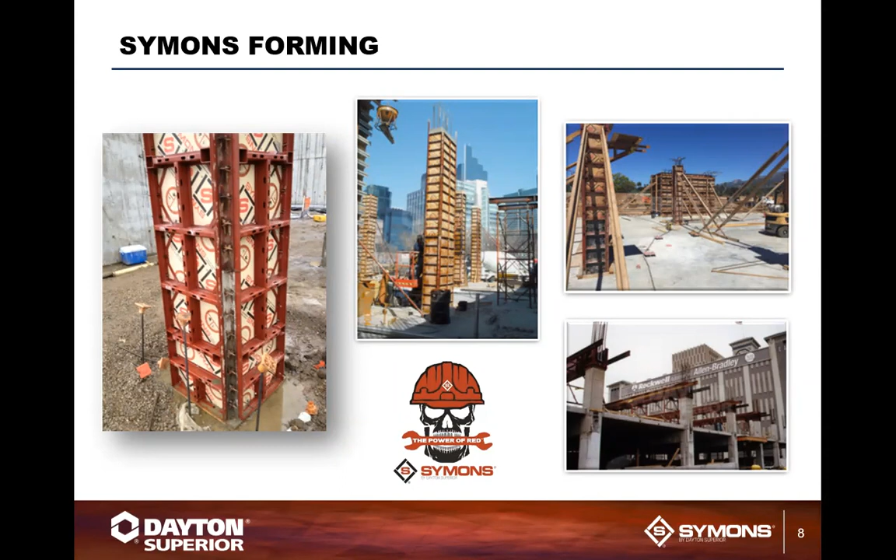So standard applications, typically here you see some of the standard applications, and a lot of these are our clamp systems. But we can gang form most of your perimeter walls, basically giving you your tub basin walls with a clamp system. This basically allows you to gang form a small random section and then use it multiple times within the concrete pour, saving you time and money, because obviously time is money.

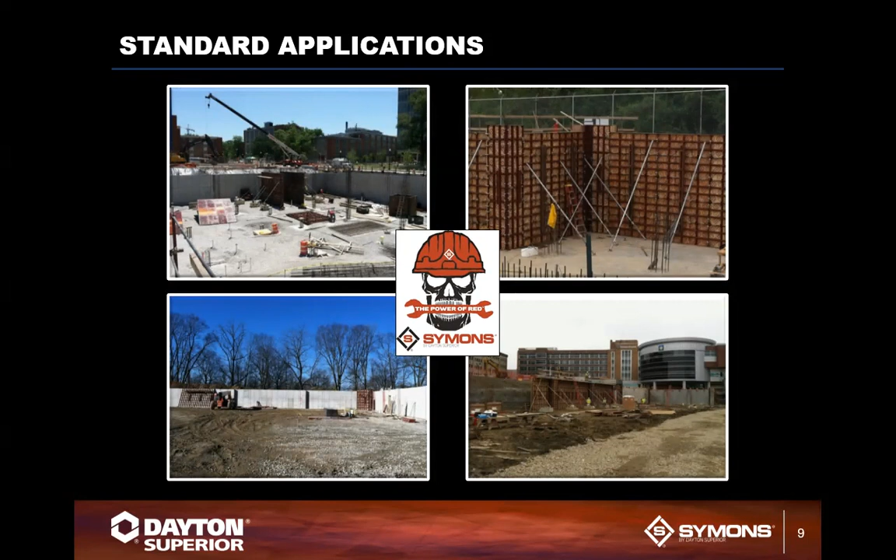As you can see, the finishes that we get from our clamp system, because of the panelized system, it's a wood face steel frame structure, puts out a really nice finish on the concrete wall. You don't see a whole lot of joint lines from the concrete forms where they actually butt up against each other.

They're easily moved by crane, and they are what I'm going to call pseudo handset. You can use this system as a handset. It is a heavier panel than our typical handset, but you can set it by hand if need be, or you can gang form it to facilitate whatever your needs are on this project.

What is that we're looking at, Chuck? Those are basically just a gang. What you see on the right-hand side is a gang form wall panel, where we've used a Symons Soldier as a whaler, to help maintain a vertical position within the form.

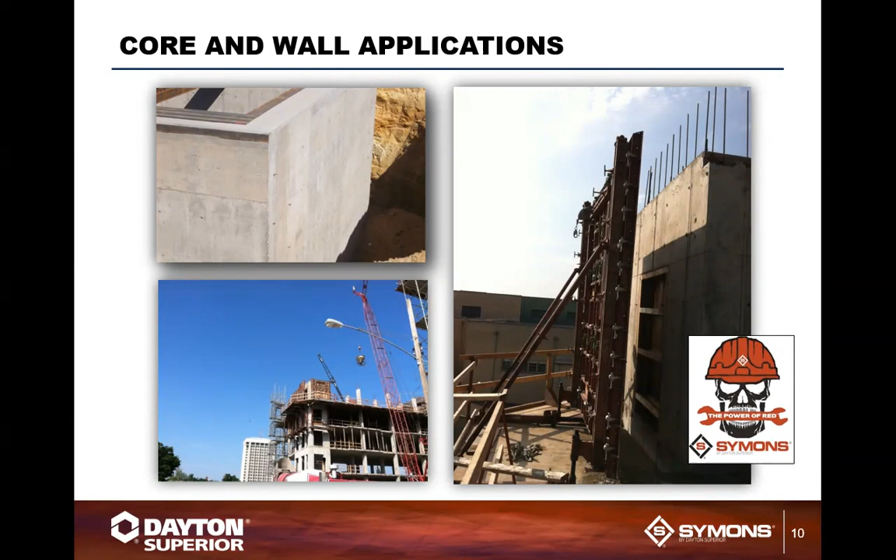This project they're looking at here was basically a hospital in the Dayton area, and it required a very high degree of accuracy when the walls were poured from top to bottom. So we used the steel soldier beam to accommodate and make sure everything was in alignment. Thank you. Always fun.

So we also have our FrameFast system. Like I said, we have multiple systems here, people, so don't get nervous when you're seeing all these systems. Call and ask, we can walk you through what systems we have.

The FrameFast system is one of the oldest systems in the market. It uses frames and X bracing and everything to help set up your shoring needs and wants, and typically comes in a 50 KSI steel project. Comes in 4 by 4 foot and 6 by 4 also.

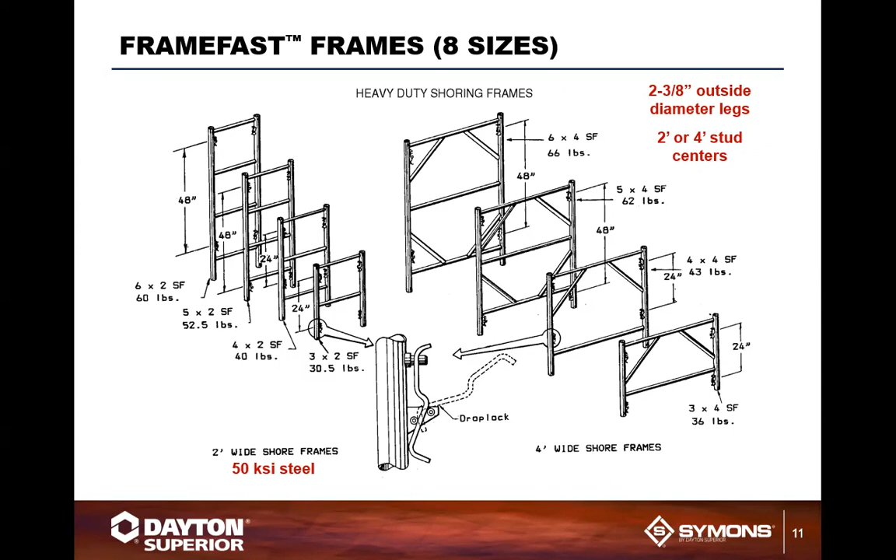FrameFast actually enables you to set up your formwork with stringers, lumber. You can have your frame, your screw jack. It's one of those systems that's been around for a long time. Is it the best system for every job? Probably not. But does it fit for a lot of the needs? Yes, it does. So it does give you an adjustability factor that a lot of systems can't. That's one of the highlights with the system.

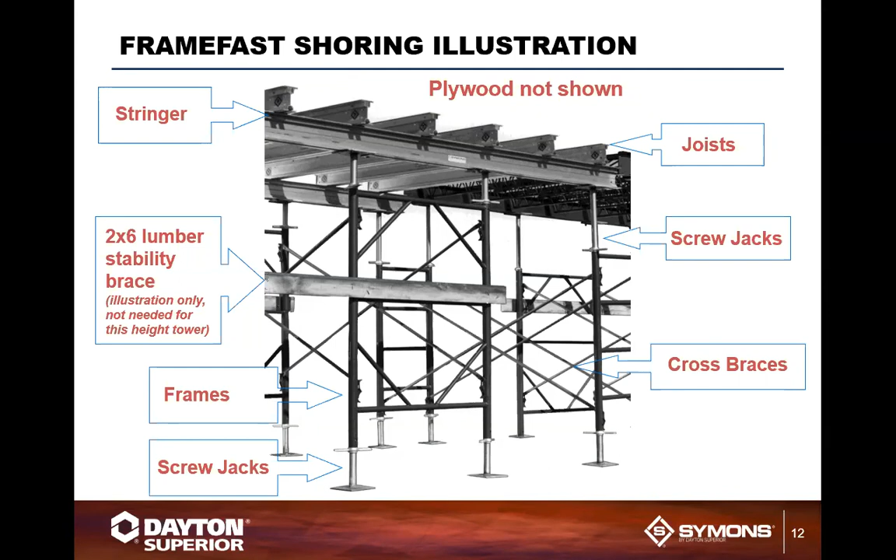Now, when we're talking about the newer systems, they actually access for high rise, we're talking our Drophead system. One of the fastest systems in the marketplace. Basically, you're setting your vertical pipes up with a frame network overhead, dropping your plywood on top of it, pouring the slab, reshoring, and moving all this material, dropping it, and then sliding it from one floor to the next floor up. It's extremely quick. You can typically look at a 3 to 5 day turnaround on a lot of projects here.

We see a lot of metropolitan areas. They typically have a 5-day turn cycle or a 3-day turn cycle. That means every third day or fifth day, they want to form another section of floor.

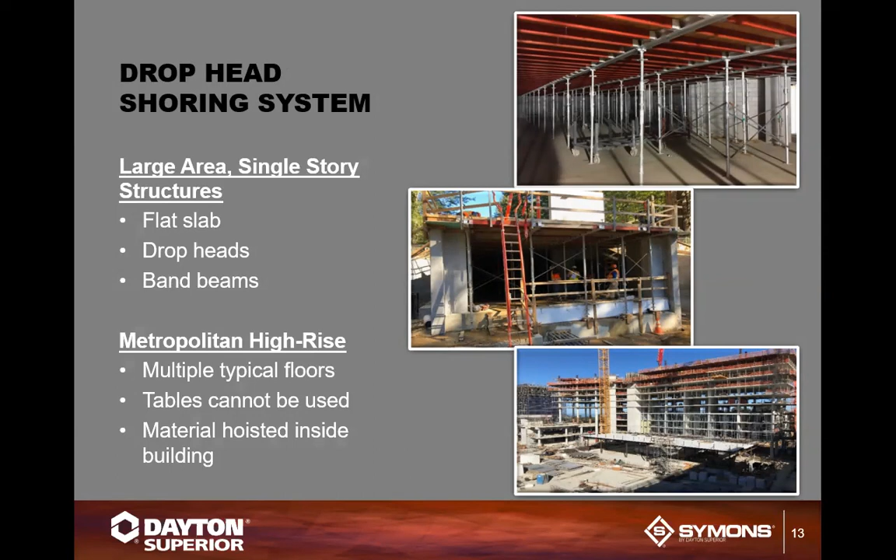The Drophead system also does a couple of things that most systems don't do, and that is it leaves basically the underneath system where you've formed up your floor wide open. So you can basically walk through there without any problems or issues. So while you're pouring the floor overhead, you can have people underneath finishing up doing things on the floor below it, which makes everything go a lot faster and quicker and easier.

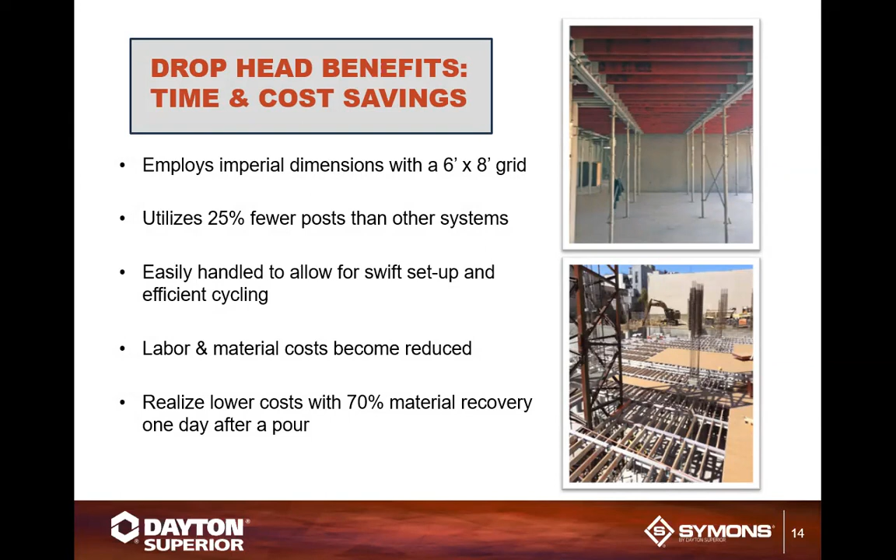We can also go into a panelized deck system, very similar to the Drophead system. It leaves everything wide open underneath here. This uses, in lieu of that, an aluminum beam system set up overhead. This one has a modular panelized system that's like putting Tinker Toys or Lincoln Logs all together so that everything falls into place.

Obviously, I'm showing my age for those. How about we go into Legos? Hey, I used to play with Lincoln Logs.

Well, a lot of what this does is these systems enable you to set up the system. You can set up a 6x6 panelized system relatively quick and easy. You can basically pour concrete slabs up to 22 inches thick on this system. And you can also set it for a clear height from 6'9" to about 19 feet, just a hair under 19 feet.

Assembles 4 times faster than conventional shoring. So once you get this system set up here, 3 guys can actually set this system up relatively quick and easy.

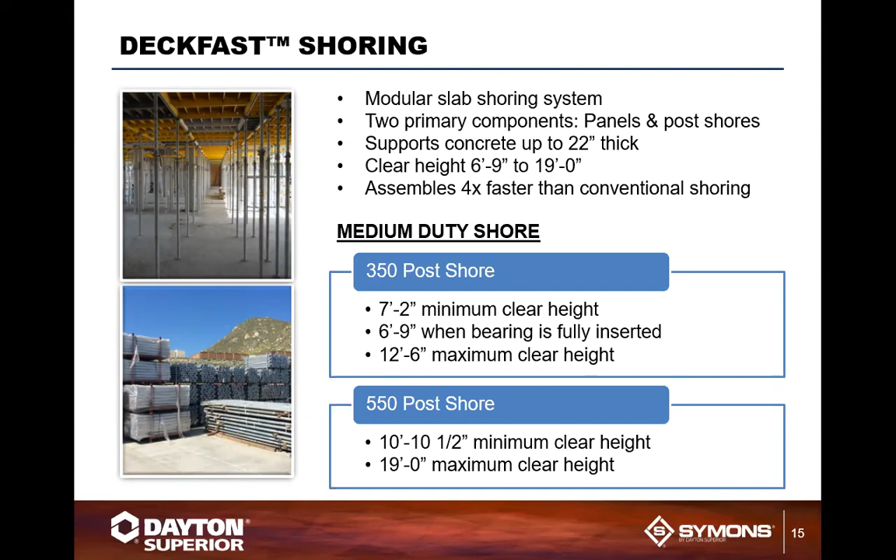As Heidi talked about earlier, we have one of the largest and most experienced engineering staffs in the marketplace, and we can provide you with drawings and solutions for every project. Usually our salespeople will work with you hand in hand to determine the best way to go, and then our engineering firm and field guys will take it from there to design something that'll work within your system.

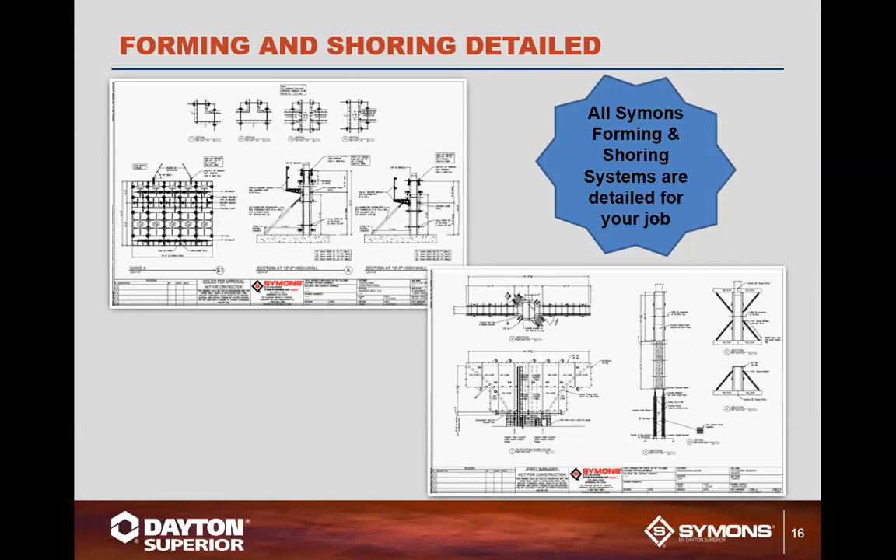One of the things besides that, we differ from everybody else in the marketplace: you can also get your forming and your accessories all at the same place. When you're pouring your floor slab, you need rebar, bar supports, and chemicals to support it. At Dayton Superior, you get your forming, shoring, chemicals, and bar supports to support the rebar. Typically, we supply everything except the rebar.

We have a full line of bar supports available, whether you want metal bar supports in different configurations based on every project's needs. No two projects are the same, so we have multiple different options: slab bolster upper, continuous high chair upper, zigzag material, individual high chairs. We can do these in a multitude of different coatings and features, whether it be galvanized, epoxy coated, stainless steel, etc.

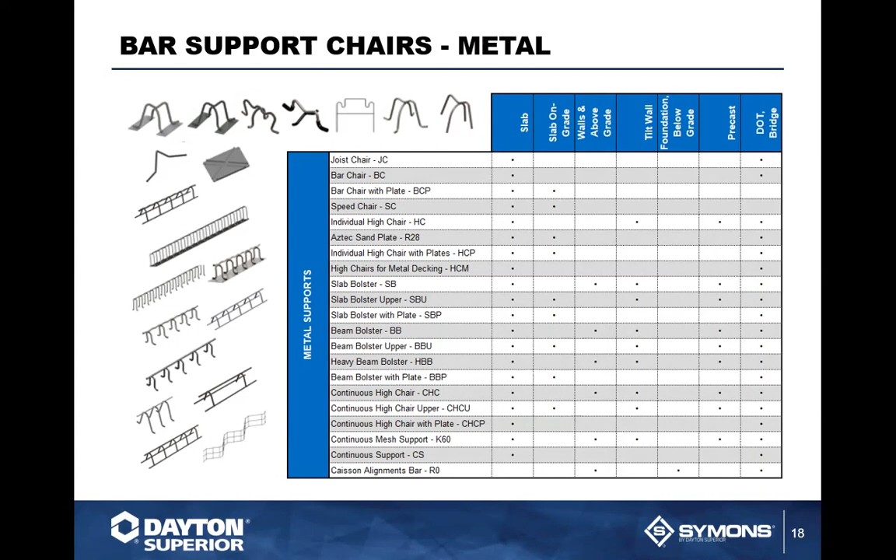With a lot of the different bars we're seeing in the marketplace now—stainless bar, stainless clad, FRP, GFR, etc.—rust is a huge issue with a lot of projects. There's a push in the marketplace to bring GFR and FRP rebar in, and the only chair that really works with that is a plastic chair. So at Dayton, we offer a complete line of plastic chairs: on-grade chairs, standee chairs, individual bar chairs, intersection chairs, and post-tension strand cake chairs. We also have space wheels, E-Z Lok wheels, and bar boots for caissons.

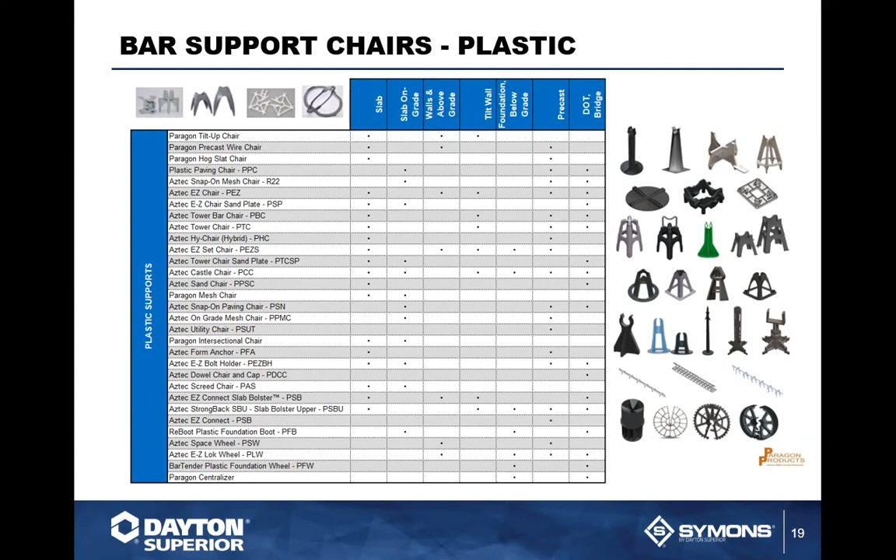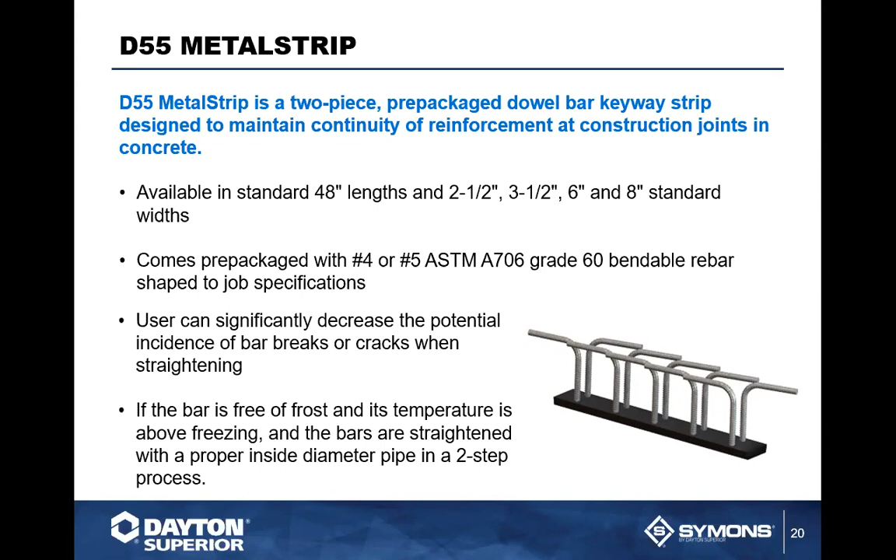We said we typically have everything except the rebar—well, a version of that. We have our D55 metal strip, which is used a lot in high-rise construction, primarily where the core shafts are going up. They want the floor slab tied into the intersection between the elevator core and the floor slab. By using the metal strip, you can embed this in your elevator core as it's poured, then peel off the top and place it, pulling out the rebar to connect your job site rebar. This is actually a splicing system, a lap splice system, that enables you to move quite freely around the job site.

So you don't have any bars sticking out while you're forming up. You can form up with this, and afterward come back, peel the top off, bend the bar out, and set your rebar. We typically provide this in A706 rebar, black and/or epoxy.

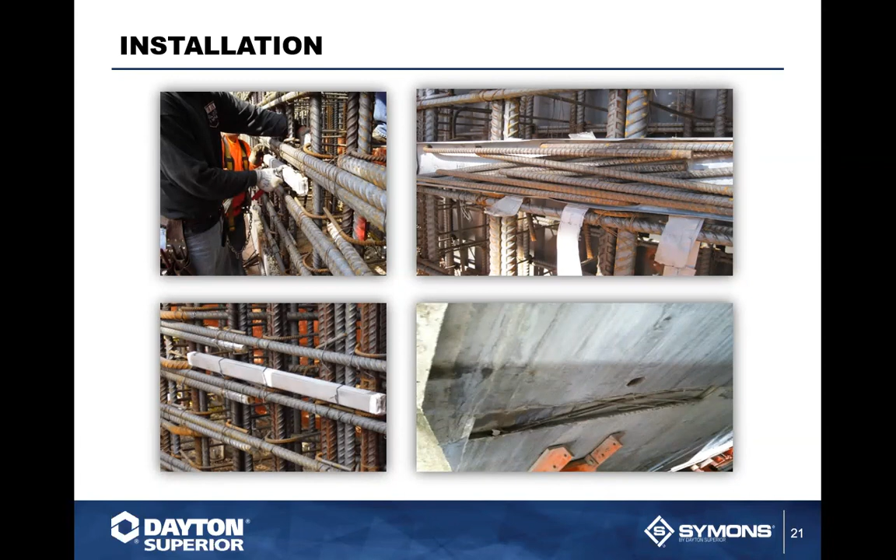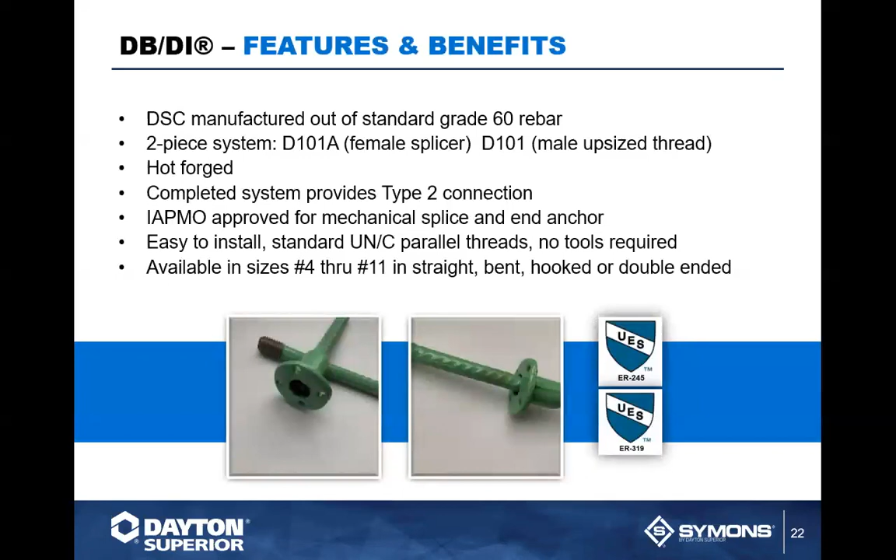We also have other items that can meet your needs. We have DB/DI for splicing, type 1 and type 2. This is a type 2 system that typically meets 150% physical yield. It's a standard one-piece rebar fabricated in our shop and shipped to the job site—a two-piece system.

We also have taper lock. If the job is large enough, or your rebar fabricator has one of our machines in his facility, he can actually thread the rebar in his shop for you. It's typically a type 2 splice for grade 60, 80, and 100, with a full product portfolio covering everything from size 4 through 11, 14, and 18. Our threading machines are some of the fastest in the business, if not the fastest in most states.

No installation tools are required with our system—it's a hand-tight system. Even I did it, not that I'm helpless. It requires basically a minimal amount of hand tightness to fully engage the system and maintain a type 2 splice requirement.

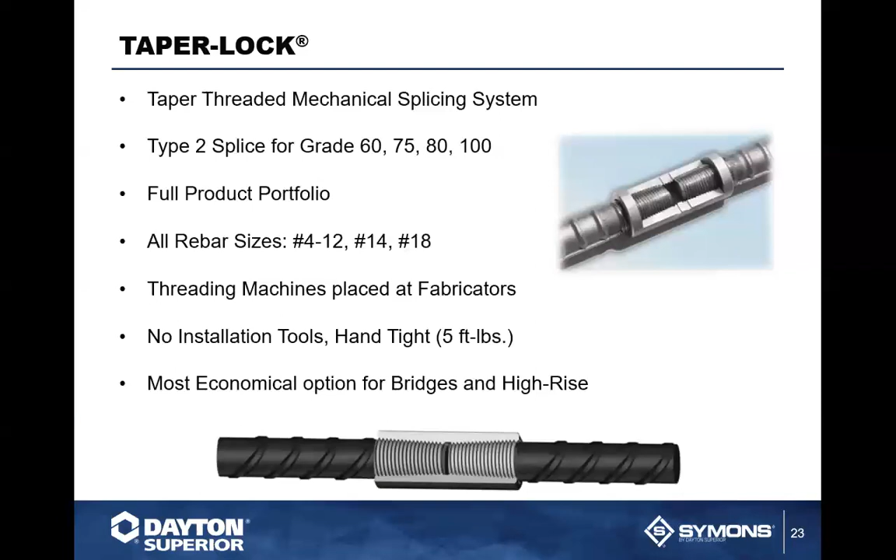And we have end anchors that accommodate any of this for terminations. You can actually have it either forged, or you can get it with a thread on or a threaded rebar with a disc that would actually thread to it. And you can get that as a type 1 or type 2.

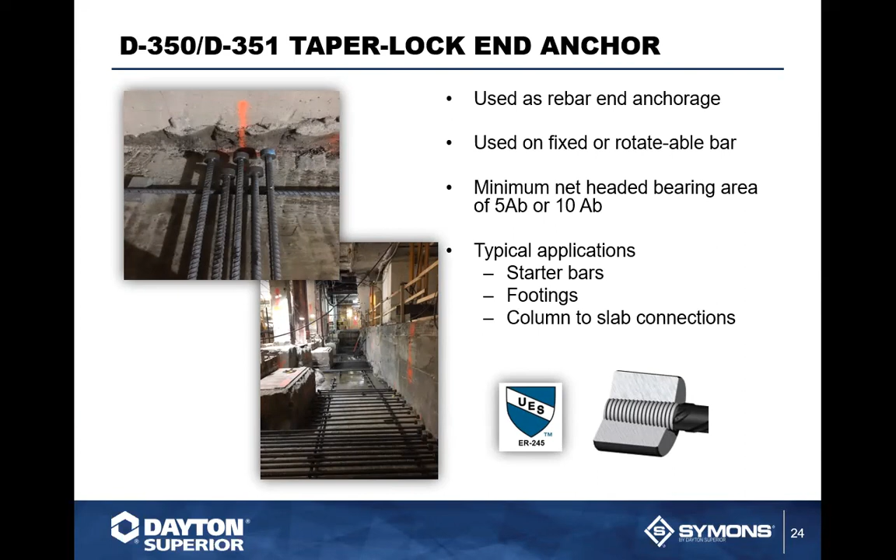And then we have our Barlock. Obviously, sometimes on projects we find that rebar gets placed in the wrong position, so you have a piece of rebar that's too short. Well, you can't stretch it, so what's a quick solution? You can use a Barlock. A Barlock was actually originally designed as a repair splice back in the 1980s, but has now come full circle, and we're seeing it used more and more for columns and caissons in new construction.

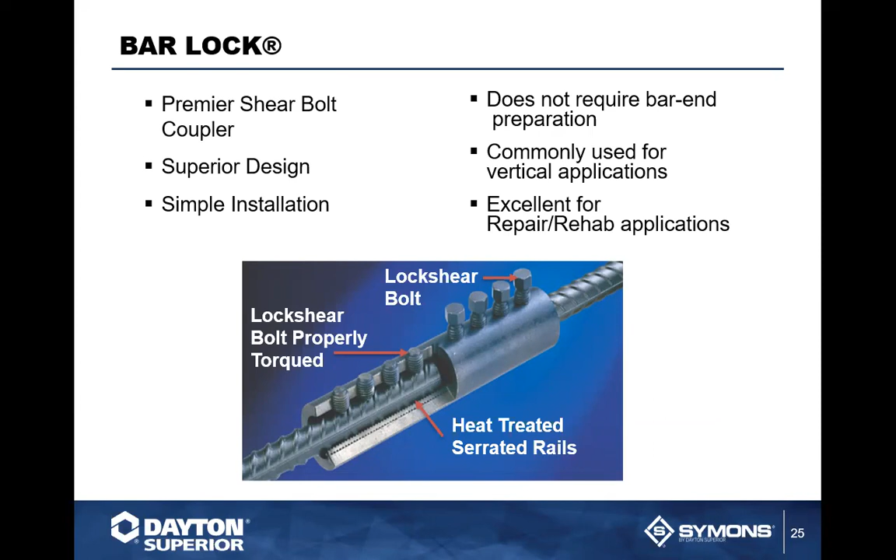Now, when we're looking at all those slabs that we're pouring, we've got to form them up and put a guardrail in place so everybody can work around safely, quickly, and easily.

And here we have our A93C Sure Guard rail post. This is what we call a slab grabber, that basically grabs a hold of the slab from the bottom. It's adjustable from on top - it has an adjustable nut that allows you to adjust for the slab thickness. You can accommodate 2x4 or 2x6 rail material. It has a toe board opening so you can set your toe board in, so you don't have to always worry about making sure you have that in place.

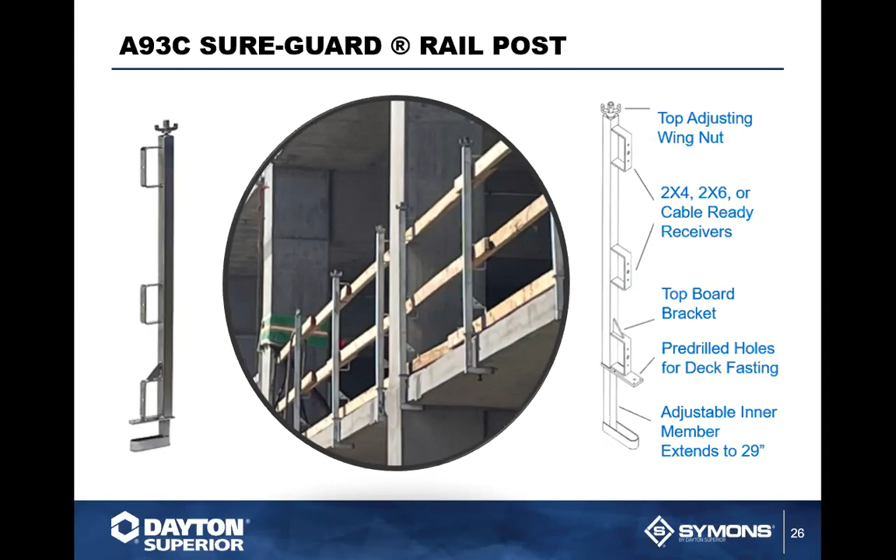This material also meets all OSHA requirements. It's fabricated with hot dip galvanized steel for durability, and can adjust from 4 inches to 29 inches, so it does give you quite a bit of adjustability.

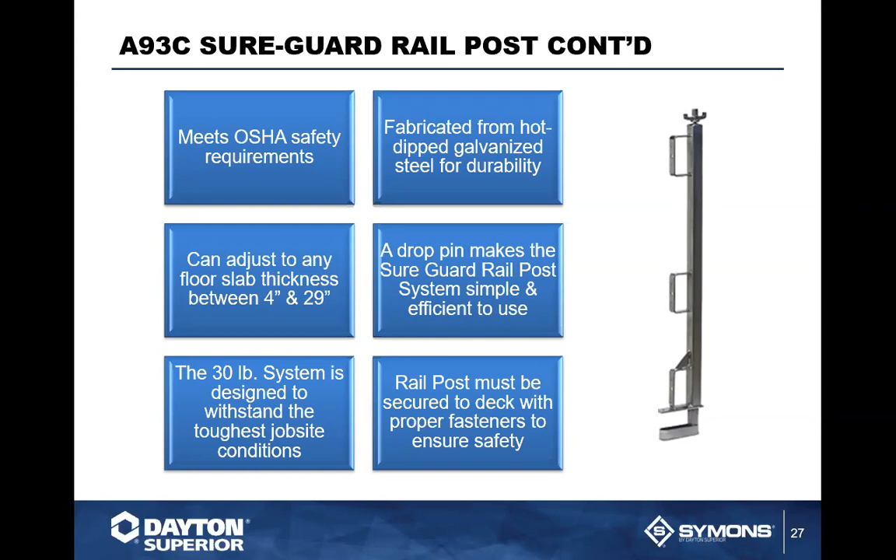The rail system here, you just basically slide your 2x in. It's a 30-pound unit that connects to it, but it'll withstand the toughest job site conditions. This is one of those products that you typically have in place, and guys will use over and over again from job to job.

Now, for chemical solutions, every project has chemicals involved in it. We've got basically any of the liquids, epoxies, and powders. Dayton Superior has one of the oldest and most complete chemical lines in the business. Some of their products have been around - I have personally been affiliated with Dayton Chemicals for the last 50 years.

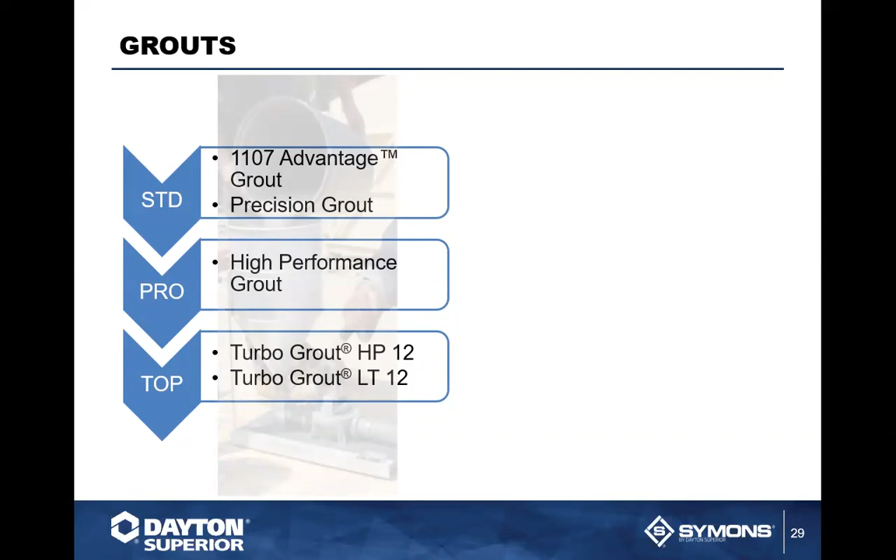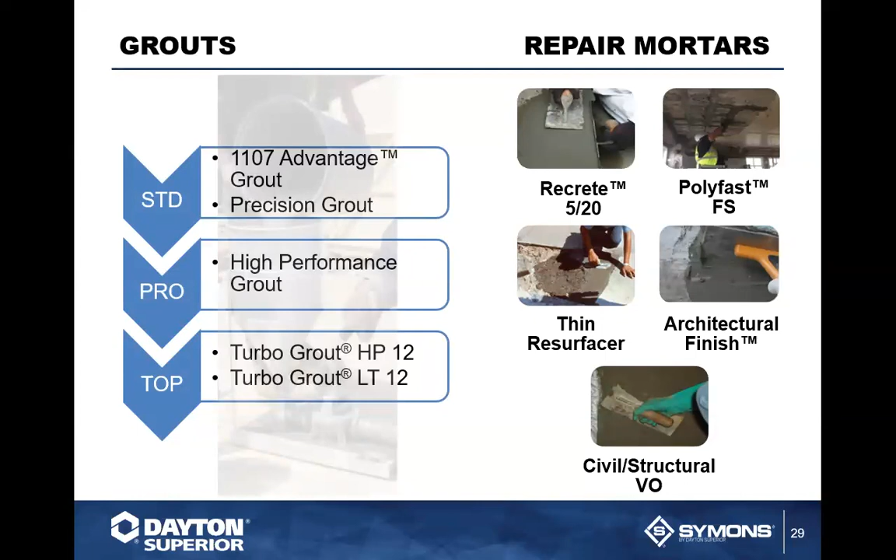When you're looking at this material for repair mortars, Dayton has some of the best repair products in the marketplace. The Recrete 5 and 20 is an excellent product. Polyfast FS is a fast setting material. You've got thin resurfacer, architectural finish for putting skim coats on and helping finish the surface. And you also have civil, structural, vertical, and overhead options.

Now, for epoxies, our epoxy line is typically the Unitex product line. A lot of the epoxies here - we're looking at a J56 injection system, J51, which is an excellent anchoring system, and a J55 epoxy grout material. We also have our adhesive J58 and J58 LPL for any of your chemical anchoring needs.

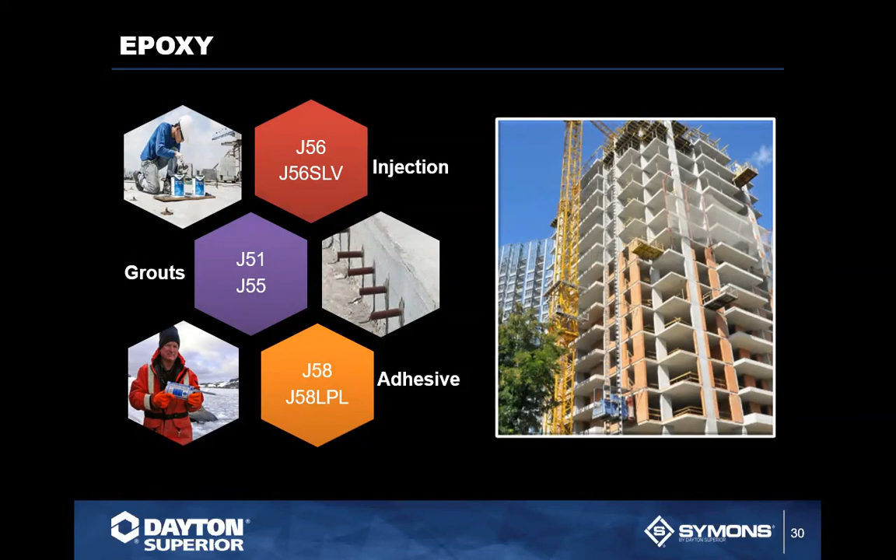Underlayments - every time you do a high rise, this is one of the biggest products on every job, because they all want their floors to be nice and level. And because they're trying to turn these floors in such rapid succession, they kind of do things haphazardly, get the project in, and come back to fix it later. Well, this is where the underlayment comes in. The underlayment material gets poured out and trues up the floor slab so your floor is nice and level, so when you put your tile, vinyl flooring, or carpet over the top of it, it's nice and level - you don't have any peaks or valleys or anything else.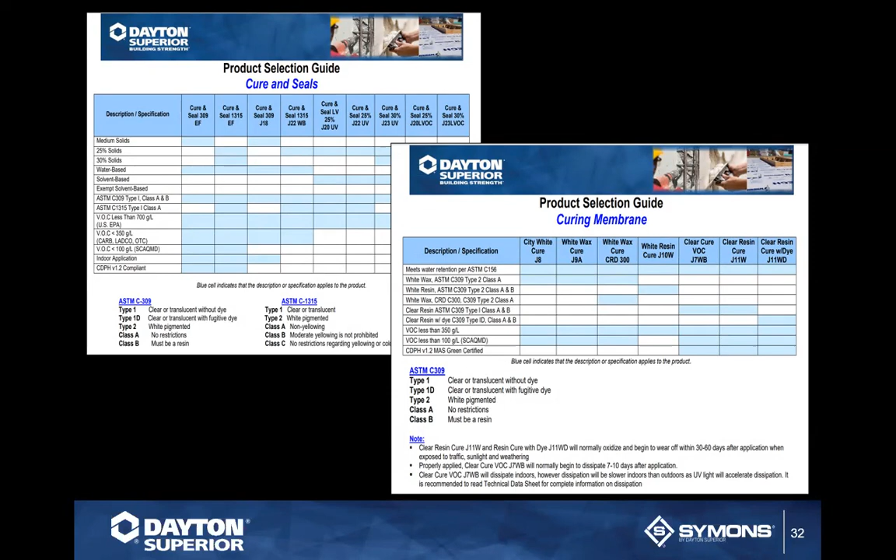So resources, where do you find all this information? DaytonSuperior.com. Best place in the world to go to is DaytonSuperior.com. You'll end up getting all of the product information you need, from the handbooks, tech data sheets, safety data sheets, brochures, engineering services, etc. It's all on there. You can do a quick search bar on it by product name and or application.

And if you have a problem, who do you call? So who are you gonna call? You got technicals, you got salespeople, you got technical customer service contact information. All of this is listed on the map based off of your region, so you can get a hold of your salesman within your region in real time. These aren't numbers that go to an answering machine. Hopefully these guys will pick up their phones and they will call you. So you'll find all of this on DaytonSuperior.com.